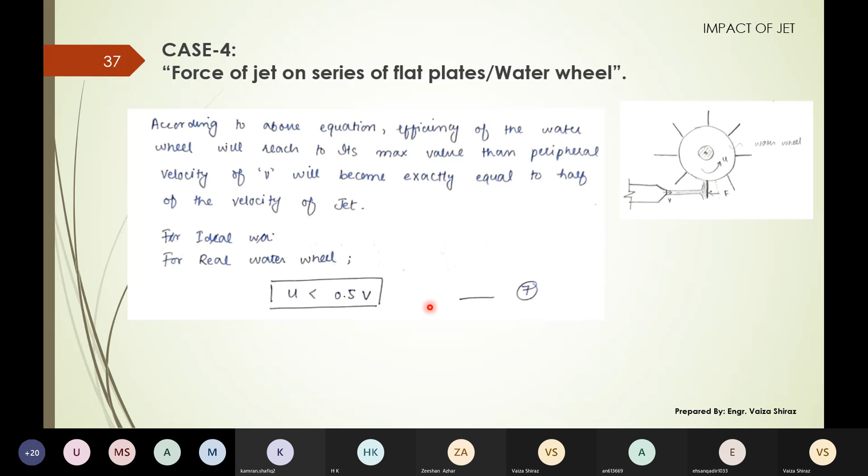Further, we have discussed that your eta will become eta maximum when your U is 0.5 V. So you can replace this U with 0.5 V in the equation of efficiency. That will give you the maximum theoretical efficiency. So in the equation of efficiency, wherever I was having U, I have replaced that with 0.5 V. So on simplification, this whole factor will come as 50%.

It means that ideally speaking, maximum efficiency of a water wheel can go up to only 50%. And for the real water wheel, the efficiency is always less than 50%. Theoretically on paper, it can be up to 50, but in the real case, it cannot attain that maximum value. It will be less than this maximum value, which is 50%.

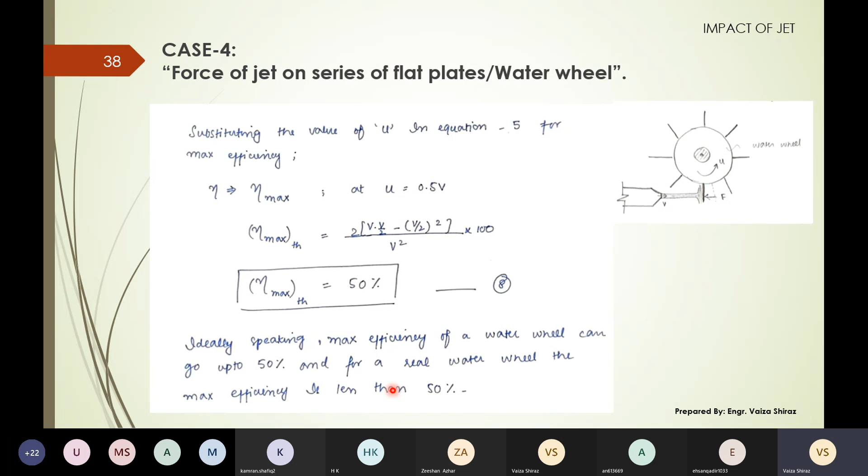Okay, now we'll solve a numerical problem regarding this case. This is problem number 1 from Douglas. This condition is regarding the water wheel. The diameter of the jet is given as 0.3 meter. The velocity of the jet is 7.5 meter per second. The velocity of the wheel is 4.8 meter per second. You have to find out the force, efficiency of the water wheel and work done per second.

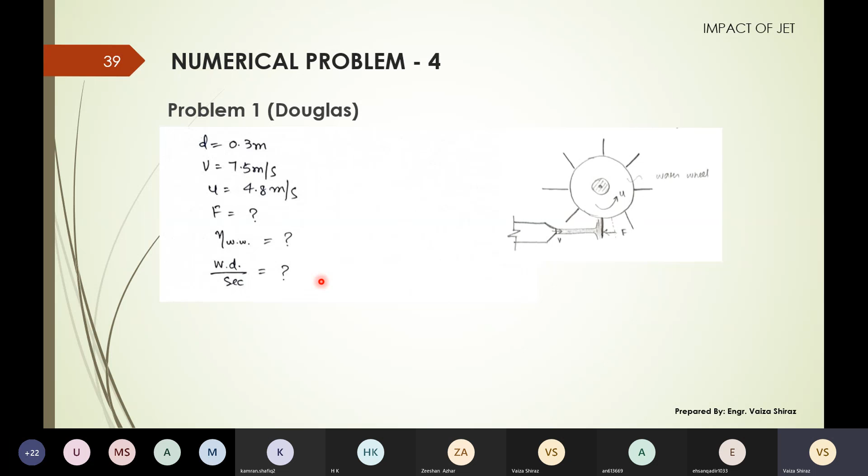So first of all, convert this diameter into area by pi d square by 4. The discharge is A into V. And I have directly written the equation for F, that is rho Q into V minus U. But if you don't remember the equation or if you are confused with any parameter, you can do the derivation during the numerical solution in 2 to 3 steps. That will give you a correct equation if you are not sure about one parameter या equation के बारे में आप confirm नहीं है.

Otherwise, if you remember the equation, you can directly write it down, put the values and find the answer. So here, I have used the equation directly, that is, F is rho Q V minus U. Rho is not given, so you can use the standard value, that is 1000. Discharge, V and U, you know these three values. Put the values in the formula and you will get F as 1431 Newton. This is the force which your jet is exerting on this water wheel.

Now next, work done per second by the water wheel, that is F into U. You know the F value and U value, multiply them, and you get this work done per second, which is equivalent to the power produced by the water wheel.

Next, convert that power into equivalent head, that is P over gamma Q. So P आपने calculate कर लिया है, gamma is the specific weight of the water, and take the standard value, that is 9810, into discharge. It is 1.32 meters of water.

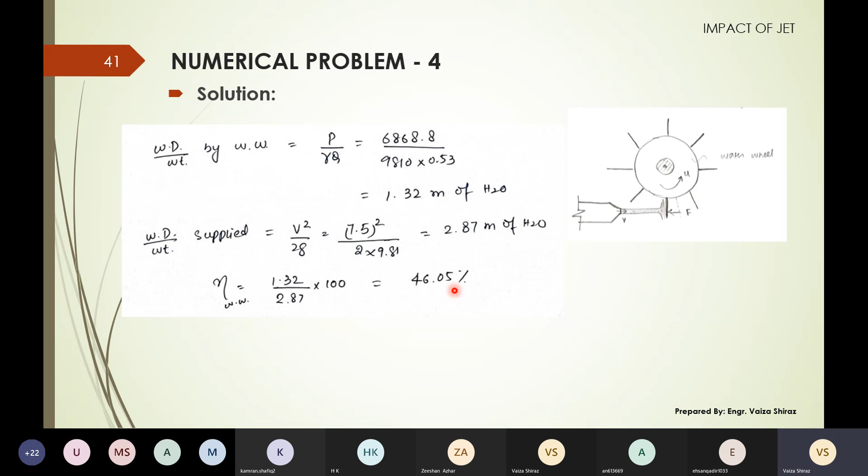So you can see that you are supplying 2.87 meters of water of energy in terms of the head, and you are having only 1.32 as output. So from the ratio, you can get the efficiency, and it is coming to be around 46%. It means that this system is converting 46% of your input energy to the output energy, which is produced at the end. Okay, so this is the efficiency of this water wheel.

Okay, now we'll start with case number 5, that is the force of the jet on a stationary curved plate. You have done your experiment number 3, and I hope you know the basic difference between the Pelton wheel and the Turgo turbine. One difference between these two turbines is the shape of the bucket. In case of the Turgo turbine, water is entering from one side and it will leave the bucket from the other side. While in case of the Pelton wheel, the jet is striking normally to the plate. ठीक है, तो you should understand the basic difference of the shapes and the jet direction.

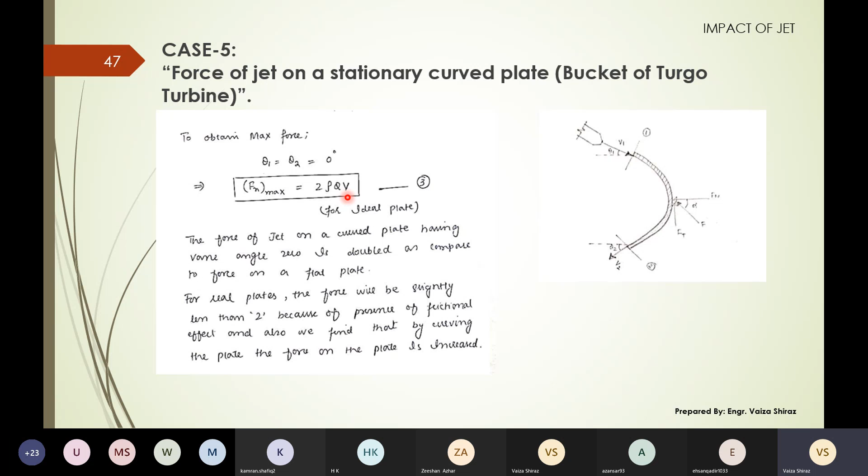ठीक है? Cos of theta will have the maximum value 1 and that is respective to your angle 0. Cos of 0 is 1 and for other values cos of that theta will be less than 1. So it means that if you put theta 1 and theta 2 as 0 degree, this factor will become 1 plus 1 and finally Fn will be 2 rho Q v. Now first of all, this is for the ideal plate because you are using V, not V1 and V2. ठीक है? So ये ideal condition के लिए है. Practically, this factor will be less than 2 because V1 and V2 will not be equal. So ये factor जो है that will be slightly less than 2.

Now question should be that why you are discussing the case in which you have to increase this Fn. ये आप क्यों discuss कर रहे हैं? आप लोगों ने दोनों टर्बाइन्स का कंपैरिजन किया है एंड आई थिंक यू हैव द बेसिक आइडिया दैट व्हेन योर जेट इज स्ट्राइकिंग नॉर्मली टू द प्लेट और एनी सरफेस, it is exerting its maximum force in that direction. Okay, so that is your best condition to have the plate movement.

Please excuse me for a minute.

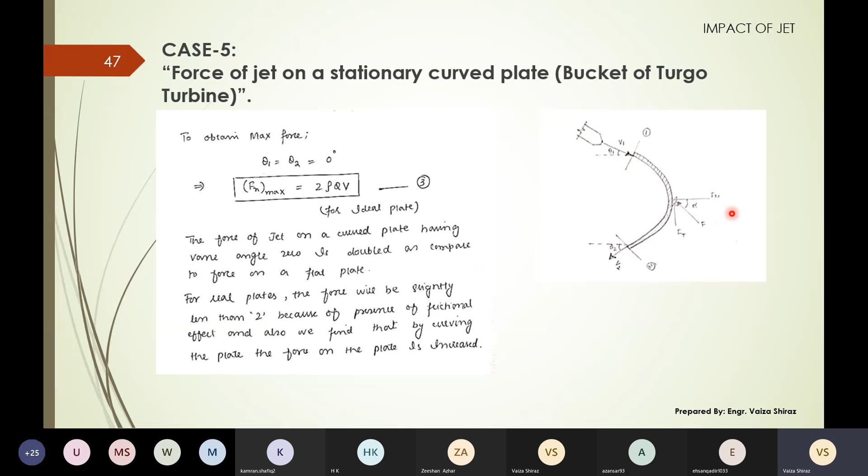Ft जो कि उस प्लेट के बिल्कुल टेंजेंट है, दैट इज नॉट कॉजिंग एनी हेल्प इन द मूवमेंट ऑफ दैट सरफेस. इस केस में भी Ft is not contributing to the movement of the plate, but Fn is actually controlling the movement. So that is why you will try to make this Fn as maximum as possible.

Okay, now what about Ft? As Ft is not contributing to the movement of the plate, it means that you don't need to increase this force. In fact, आपको इसे reduce करना है. Why? Because this Ft is a force which is acting tangent to the surface.

ठीक है, ये इस प्लेट के टेंजेंट है, but it is exerting an axial thrust on the other components of the machine. या आपकी मशीन के बाकी components पे axial thrust apply कर रहा है. ठीक है, so it means कि इसका advantage नहीं है आपको. In fact, you will have a disadvantage in a form that it can cause harm to the other components. ये different components के ऊपर unwanted force apply कर रही है.

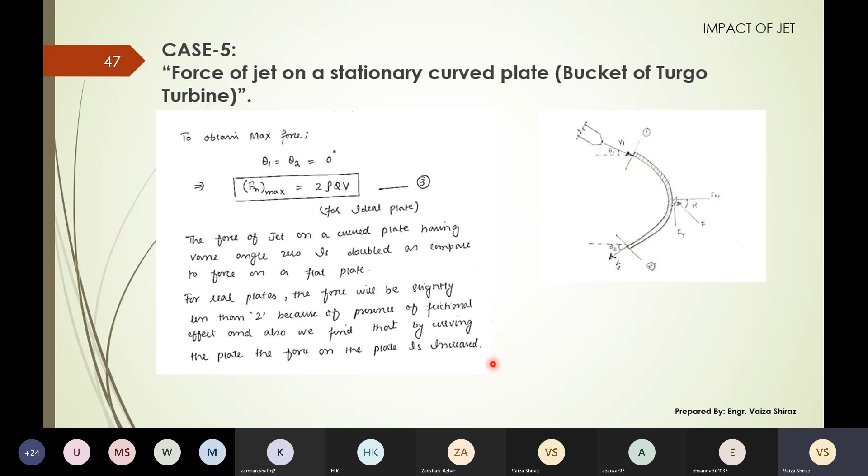Now we will do the same derivation for Ft, and we will see the condition in which we can make it as less as possible. So for that, first develop the equation for Ft. We will apply the impulse momentum equation along the y direction, and all the steps are very easy. Just see the direction of the components. v1y is negative and v2y is also negative. इस केस में आपके दोनों y components जो है वो negative हैं.

And finally you will get this equation. It is rho Q (v1 sin theta 1 minus v2 sin theta 2). This is for the real plate. Okay. Ideal के लिए आप कैसे करेंगे? You are considering that you don't have any loss in the velocity. So in that case, you can take v1 and v2 both equal. So that is your equation for Ft. It is rho Q v (sin theta 1 minus sin theta 2).

Now, as I have told you earlier, we are intended to decrease this Ft as much as possible. For that, आप दोबारा से डिजाइन पैरामीटर्स देखें. ठीक है, आप क्या करेंगे? डिजाइन पैरामीटर्स में आपके पास है

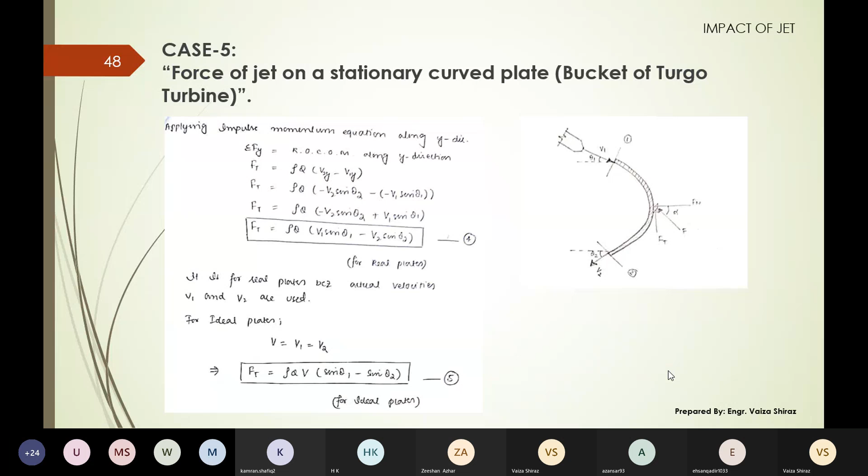Okay, so see the design parameters. Theta 1 and theta 2 are the factors which you can control during the design. So if you see this equation, it is sine of theta 1 minus sine of theta 2. It means that if you have to

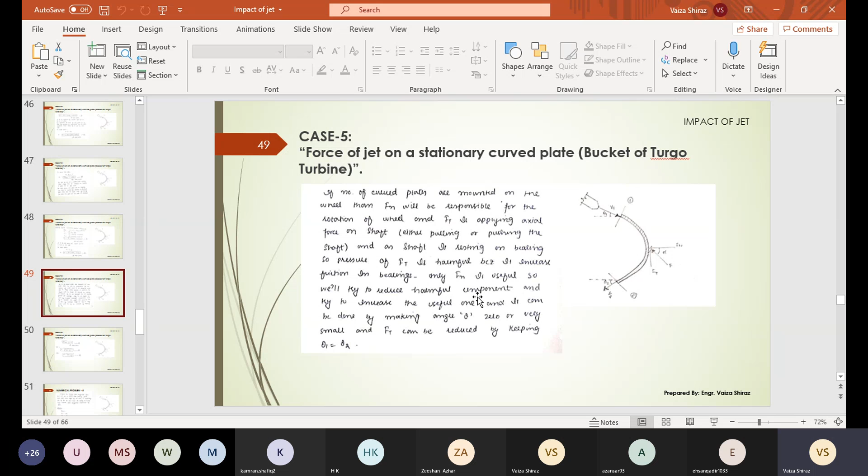Okay. So in this paragraph, I have written the same discussion, that why you need to increase your Fn and why you have to decrease your Ft. ठीक है. So if you keep both factors in mind, जिसमें आपने Fn को increase करना है और आपने Ft को decrease करना है, you can do that by making your angle theta 1 and theta 2 both as 0. अगर आपने दोनों को 0 पुट किया है, that will make your Fn maximum, और इन दोनों को 0 पुट करने से दोनों इक्वल भी हैं, that will decrease your Ft, it will make it 0. So your Ft minimum is 0 for the ideal plate.

If you know Fn and if you know Ft, you can find out F, that is the resultant of these two. Also, alpha is tangent inverse of Ft over Fn. Okay, so this is regarding the force of the jet on a stationary curved plate, and this bucket is similar to the Turgo turbine.

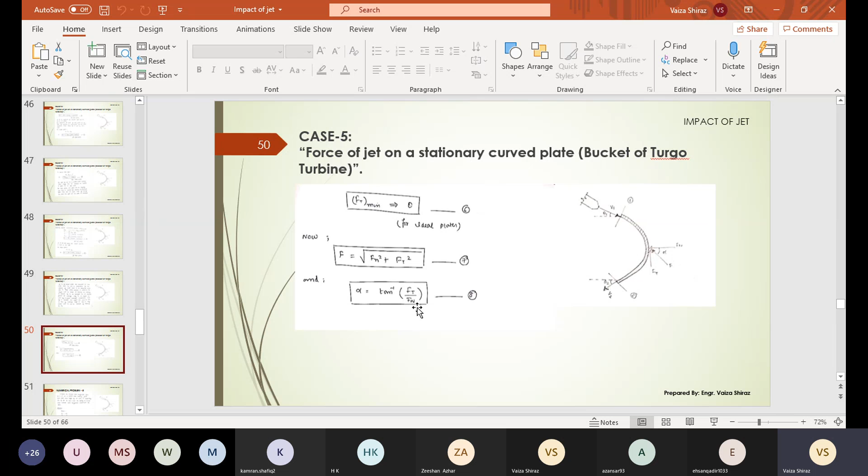Okay, now see this numerical problem. In this problem, you have to find out Fn and Ft, and theta 1 and theta 2 are given to you. Diameter of the jet is 4 centimeter and the velocity of the jet is 50 meter per second. So अगर आपने Fn और Ft find करना है, simply apply the equation along x and along y and put the values in the equation. Initially you will find out area, that is pi d square by 4. Discharge is A into V. Fn is rho Q V1 cos of theta 1 plus V2 cos of theta 2.

Now question is, what is the reduction in V2 as compared to V1? In this case, no idea is given about the frictional losses during the flow on the curved surface. So you can assume the ideal case, that you don't have any frictional losses and the velocity is same at inlet and outlet. So V is V1 and it is equal to V2. So this is your final equation for Fn: rho Q V cos of theta 1 plus cos of theta 2. You will put the values and you will get Fn. It is 5955 newtons. Some of you can get the answer as 5986 newtons. That is due to the rounding of the numbers.

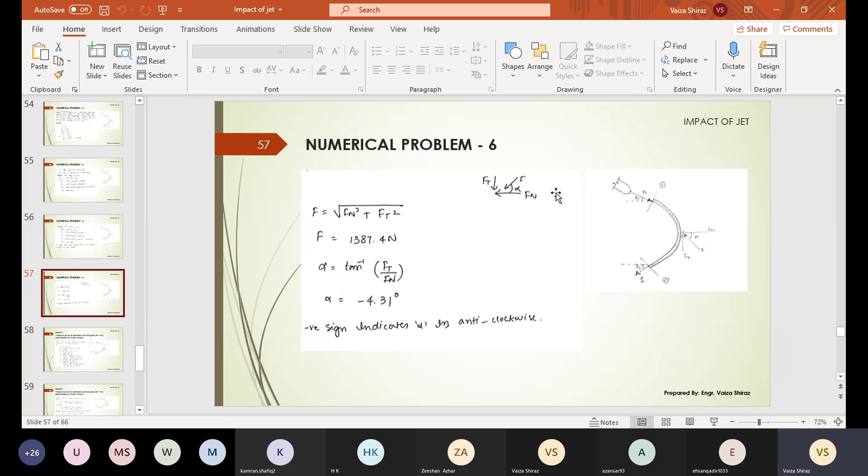Okay, now the next case, that is case number 6. It is for the force of the jet on a stationary curved plate, but in this case your theta 1 is 0 degree. And this curved surface is similar to the half bucket of a Pelton wheel. तो आप लोगों ने Pelton wheel भी स्टडी की है.

You have also covered the sections of both buckets, so you can easily visualize that your jet is striking normally to the plate in case of the Pelton wheel at the center where you have a splitter. Your jet will split in two parts, glide on the surface and leave the bucket. So this part where theta 1 is 0, or the jet strikes normally, refers to the splitter. And I have considered only one half of the bucket, which in this case is the downward compartment. So this curved surface refers to the half bucket of the Pelton wheel.

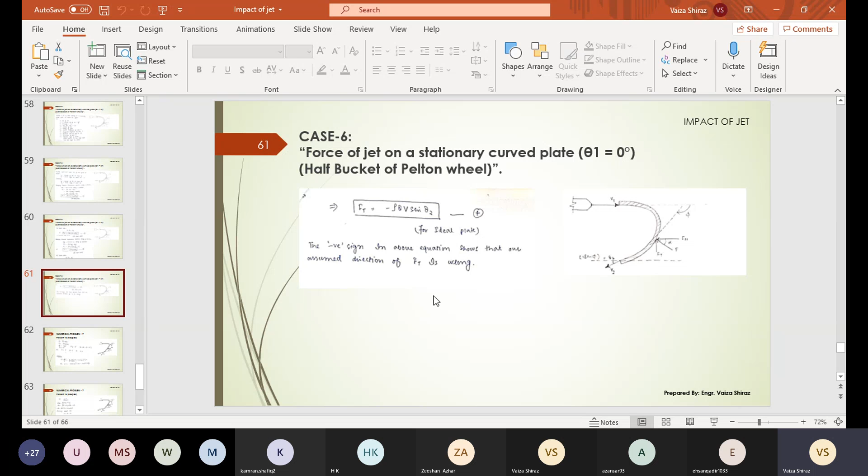So I'm hoping that before your next class you will at least go through all the cases. ठीक है, ताकि आपको basics at least clear हो. Then you will clearly understand what I am telling you in that case, क्योंकि वो आपकी curved surface है और वो moving है.